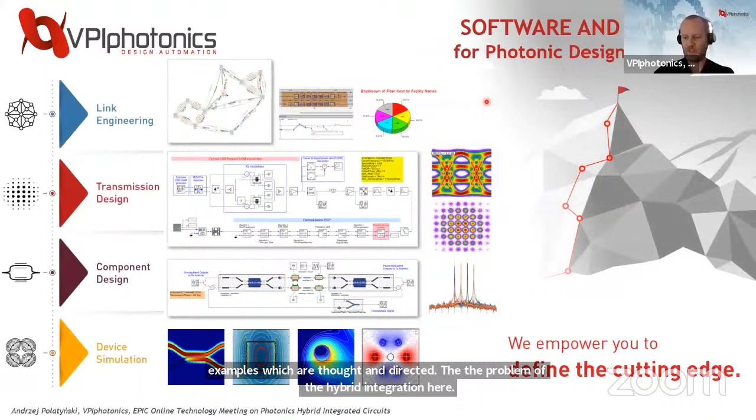And the third, industry leading - we are cooperating with many industrial and research collaborations to develop state-of-the-art PICs, also to set some standardization. I will just show you a few examples which are touching directly the problem of hybrid integration here. From our product perspective, I mentioned we are covering everything from the device to the system level. Today I will focus only on the PDK interface, which allows us mainly to link the foundry dedicated components to enable the PIC design with them and fabrication of the chip afterwards.

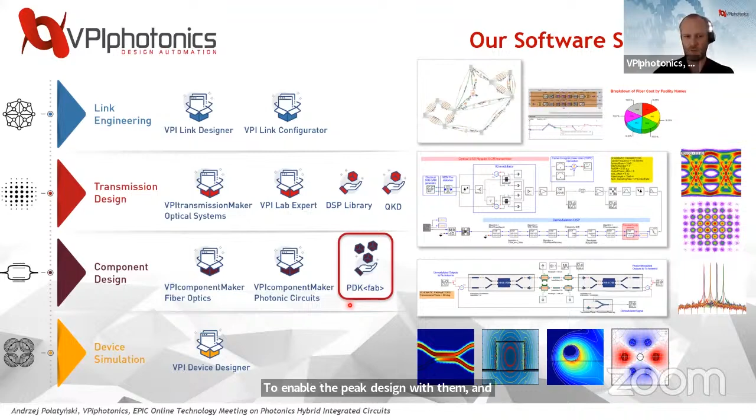So very shortly about the PDK - in a standard approach, the foundry just provides some kind of description of their processes in the form of a PDK library describing all necessary information, including the performance of the building blocks, layouts of them, but also the detailed description of the process that is created, that mainly reflects the technology steps in order to fabricate it.

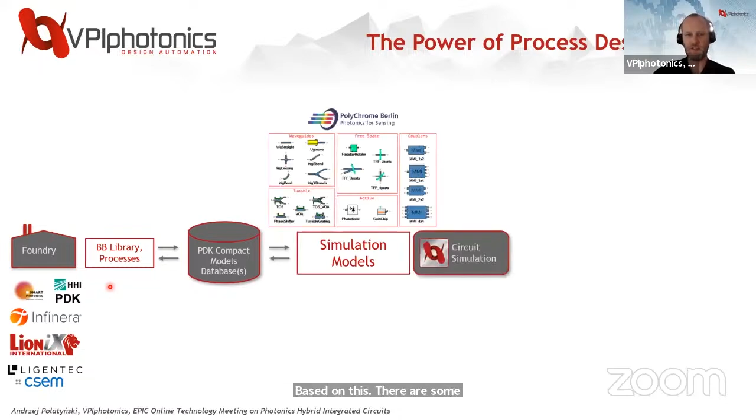Based on this, there are some PDK compact model databases created, and we created simulation models for it. These models mainly take the information from either measurement of the fab or simulations. And of course you want to bring this in hopefully some standardized format that will enable automatic creation of these generated simulation modules. Then once you have the simulation models, you are of course building your circuit design, which you are interested in.

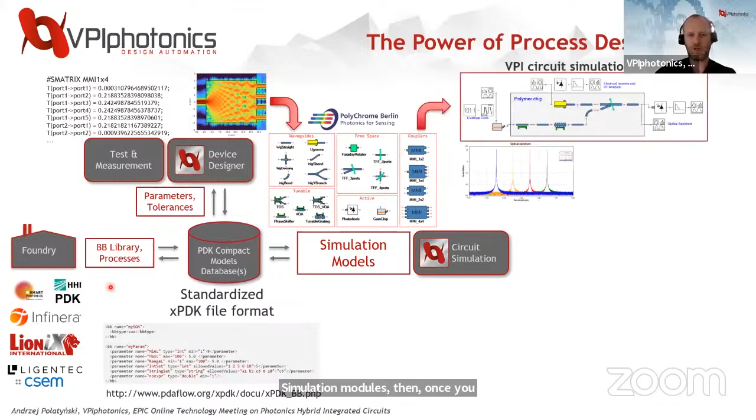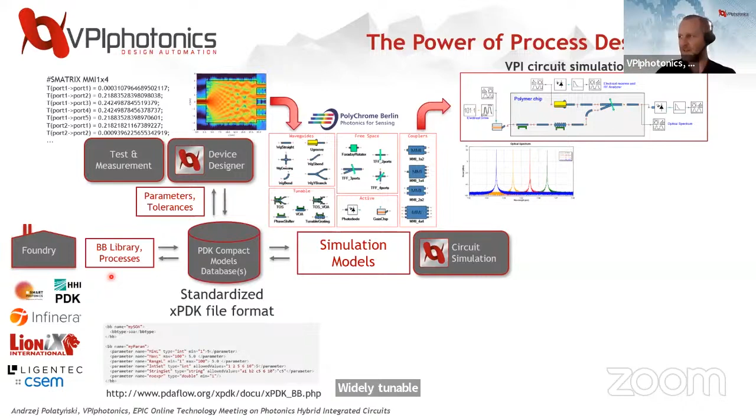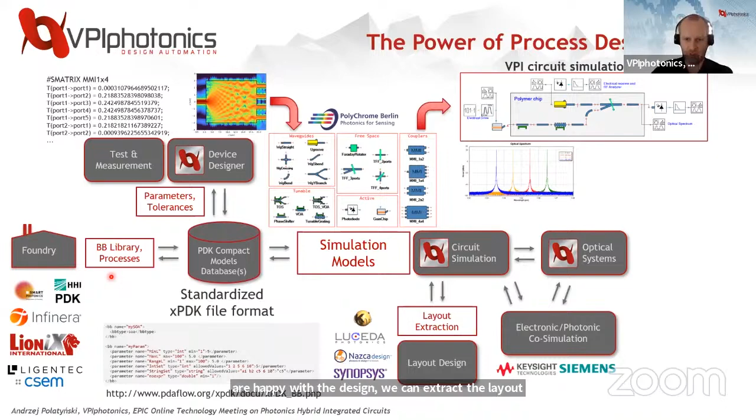Here I will come back to this example, but we see the reproduction of the widely tunable laser, which was shown by Moritz in HHI. As I mentioned, I will come back to this. The idea is that mainly we can simulate the PIC itself, but we can also verify this PIC on the system level. We can co-simulate it with the electronics. And once we are happy with the design, we can extract the layout process with the layout design in order to prepare the GDS file, send it to the fab to get our assembled PIC.

So now I will talk briefly about the different approaches which are used between different platforms in order to enable this hybrid PIC design. And first, I will start exactly with mentioning this transceiver in that part, which is a bit extended version of the HHI laser shown before. But mainly, we are interested in the final design, which you can see is already including some fiber component, including the coupled laser with the photodiodes on chip.

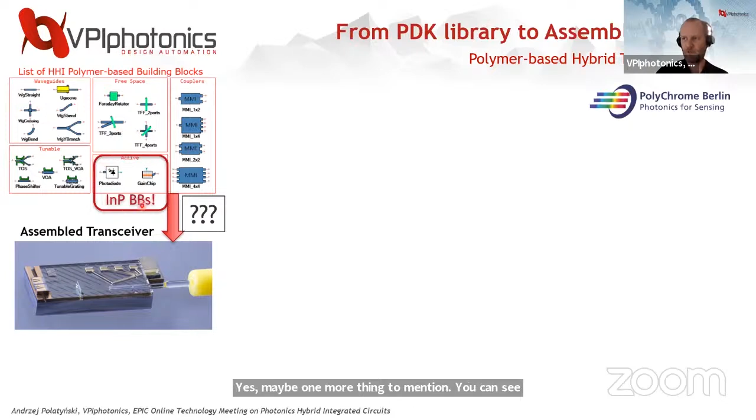But we start just with the building blocks. So how we do it, how we go through it. Yes, maybe one more thing to mention. You can see that within the PDK library for this polymer platform, we are already having some indium phosphide components. And that's exactly one of the typical approaches how foundries can enable direct integration of the platforms. So you are just building your polymer chip, which will include directly on top of it some additional gain sources, some additional photodiodes, or modules which are enabling direct coupling to the fibers.

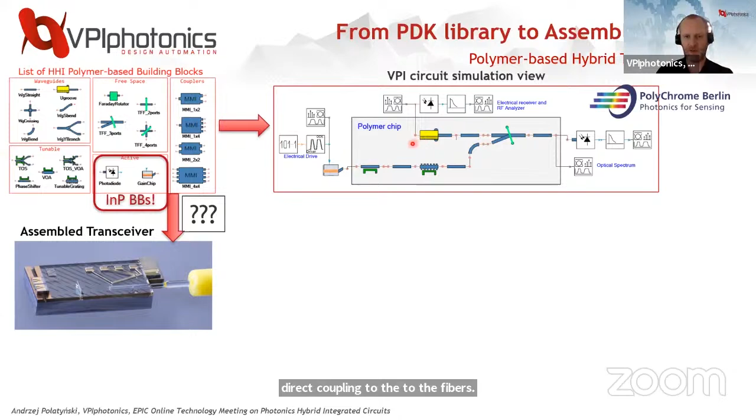And those components are already optimized for the fab, and they can be fabricated and assembled by the fab directly. This means that after your simulation, after you can show the results which you are expecting, you can directly export the layout to one of the desired layout tools and proceed with the GDS generation. Please note that the GDS is including only the layers here which are belonging to the polymer chip, but you can see there are some predefined spaces which are enabling you directly the integration of these components with

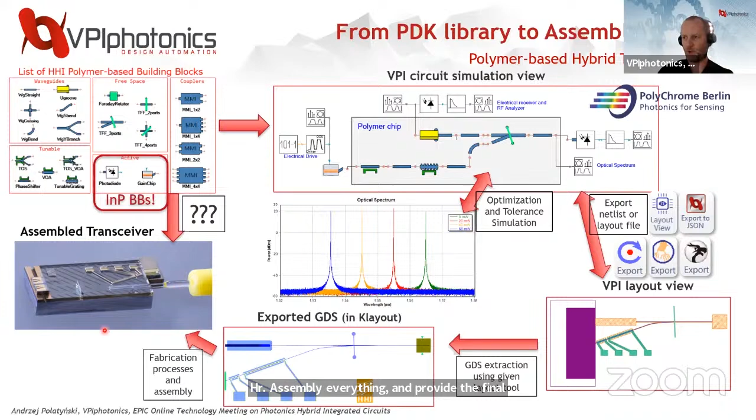this different platform modules. And in that case, if you provide such design with additional information how this needs to be coupled, HHI assembles everything and provides the final chip, which is assembled here with the polymer chip fabricated by them, and also the indium phosphide components created by their indium phosphide foundry.

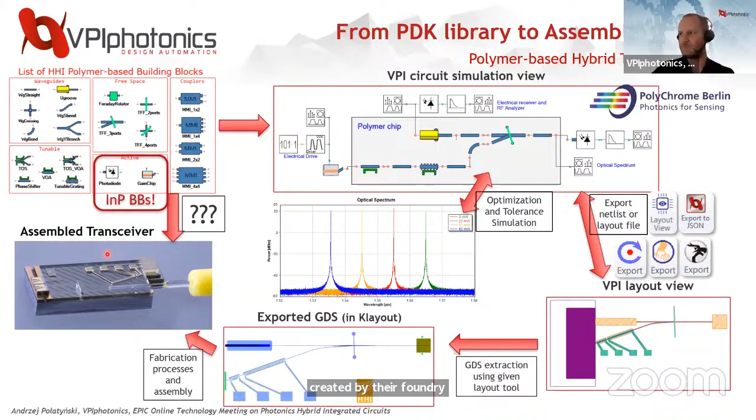Okay, but what's happening to all other foundries which don't really include the information about the standard component integration? So standard designs for silicon nitride, lithium niobate, or polymers don't really have directly the modules enabled there by the fab. And in that case, there are mainly two approaches by now, how you can make a design and fabrication. Firstly, directly talk to the fab and discuss with the fab what kind of building blocks they are offering.

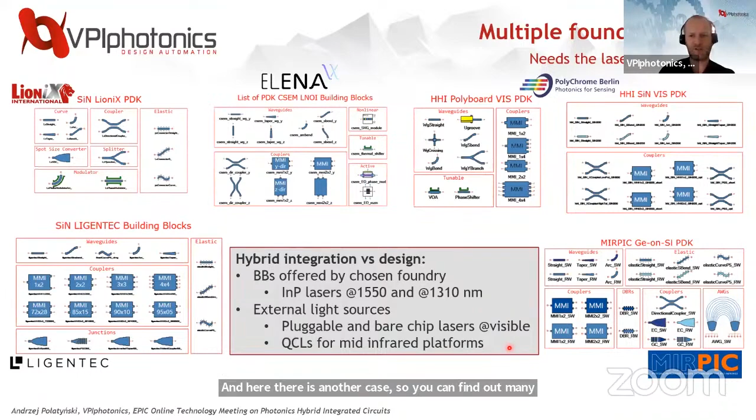And here a good example was the design which I mentioned already before, although the building blocks were generated there in the PDK directly, but you can discuss about different kinds of indium phosphide lasers or gain chips, which could be coupled there directly. On the other side, you can also use some external light sources. And here, there is another case, so you can find many pluggable or bare chip lasers for visible light, a lot of QCL lasers for mid-infrared, but there is one big issue with them. There is no clear information how to build an interface with them unless provided by the fab or provided by

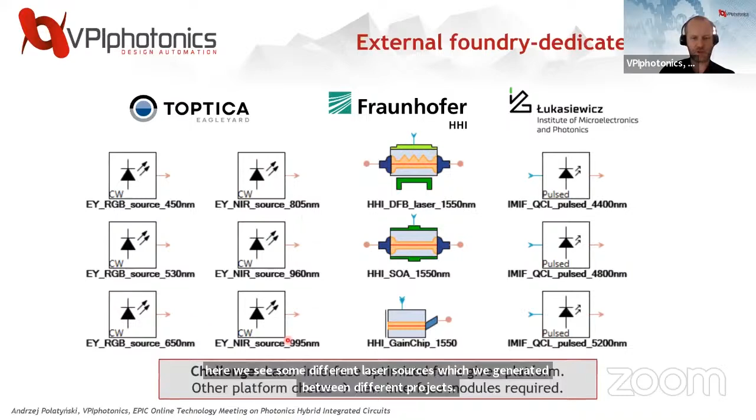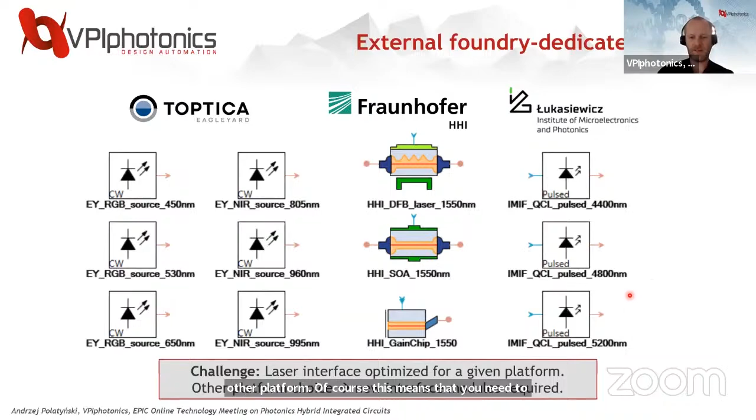the laser manufacturer. So here we see some different laser sources which we generated between different projects with some structures for visible, short near infrared, C-band and also for the mid infrared. They all were optimized in that case based on the project work for a given platform. If you would like to use these components with some other platform, of course, this means that you need to build your own interface module. And let's show how we can do it on an example.

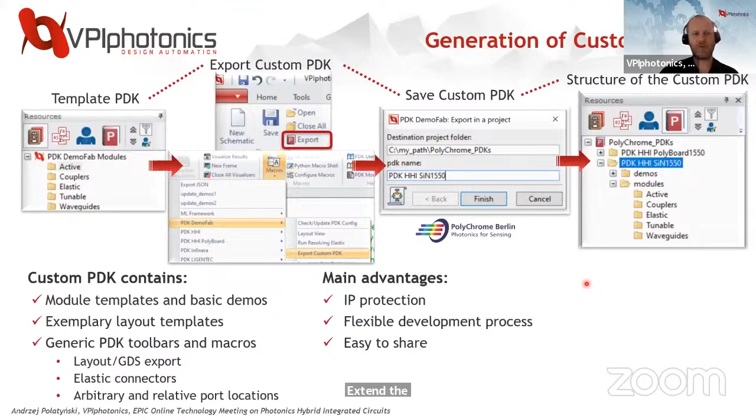But first, how we could generate, in that case, a template of the PDK that could work for us directly by enabling generation of your own custom PDK. So here we have a process of generating such a custom PDK. Mainly, it will include some templates. It will include some additional layout information. And while you are creating your own PDK, you can easily protect the IP. You can extend the existing PDKs and share them mainly with your own partners of interest.

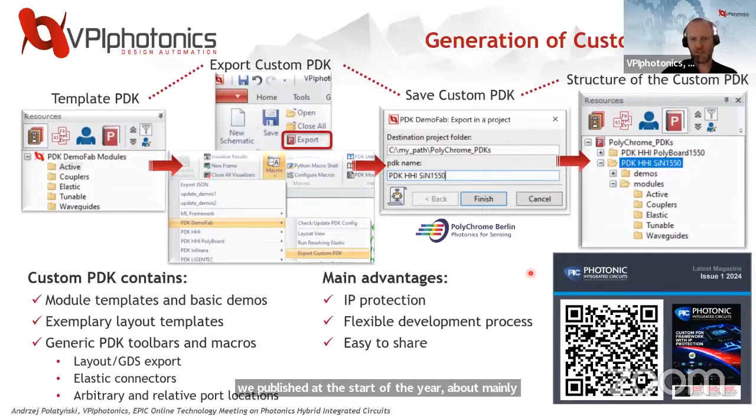And if you are interested in this process, please refer to the article that we published at the start of the year about mainly design freedom and IP protection using the PDK. And how this PDK can be used, based on the example I will show here:

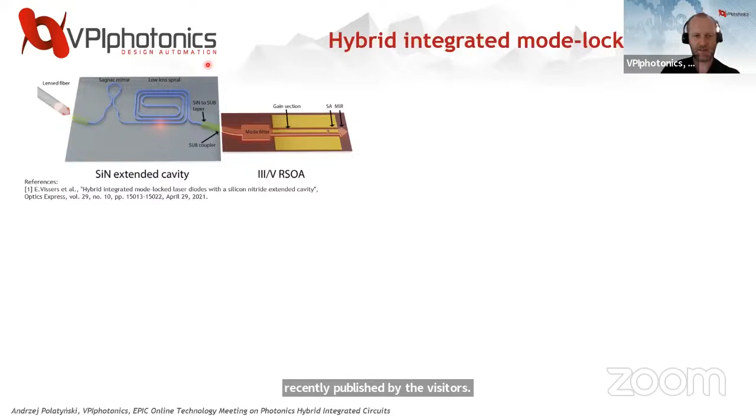the hybrid integration of the mode-locked laser using, on the left side here, the silicon nitride extended cavity based on LioniX. And here we have the SOA structure based on Smart Photonics. This idea was published three years ago by Vissers, mainly explaining the design itself and fabrication of the structure.

So very easily we are creating a library of the components. We are using on the left side the components for the silicon nitride, equivalent with the PDK of LioniX. On the right side we have the indium phosphide components equivalent to Smart Photonics and adapted to the performance of the measured devices.

And here we see one additional magic component, which is actually the spot size converter between one and the other platform. I'm especially not looking into this component, but if you are interested exactly how it functions, you can refer back to the paper. It's described in detail, including even some tolerances of the coupling and misalignment with the total map, how the coupling should behave.

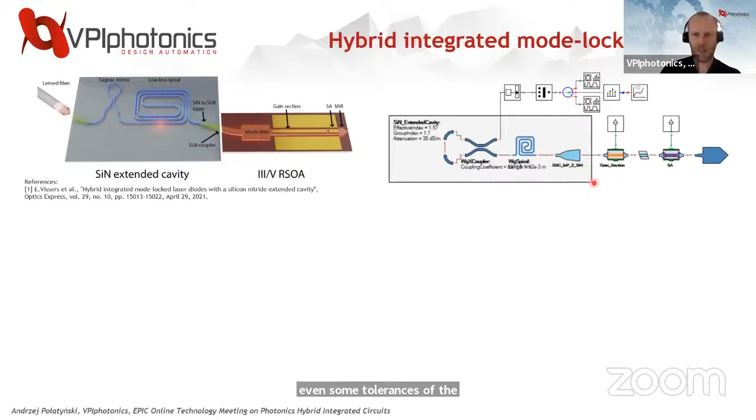But from the perspective of the design, such combined platforms can be created on a single chip when you are directly simulating the performance. So here we can see the spectrum of our laser, we can measure the repetition rate and also observe the waveform very similar to the ones achieved in the paper.

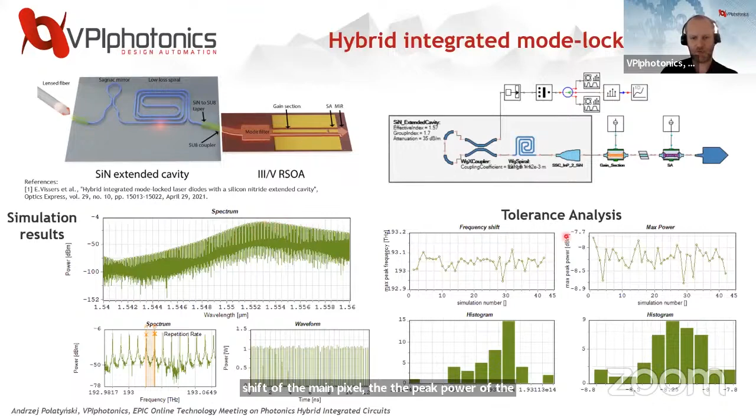And of course, on top of it, we can perform some tolerance analysis, either based on the tolerance analysis implemented by the foundry or by varying parameters of interest and providing a tolerance analysis of our choice. In that case, I was using mainly the provided information from Smart Photonics on the tolerances plus some additional Gaussian variations on given components to investigate how the frequency shift of the main peak, the peak power of the whole spectrum, and the maximum power of the spectrum behave based on a given number of runs.

So to conclude, what you can do for us: firstly, you can use our tool to develop your own PDKs and share them with your customers in order to allow them to follow up with your designs. But also we will be very happy to get feedback from you regarding your design needs and your PDK development, especially if something you believe should be added to the tool.

And where we can help you: we are enabling various strategies for the PIC design, offering the workflow from devices to systems via circuits, and offering you the custom PDK framework, enabling you to develop your own components and interfaces to build the design and fabricate those integrated platforms directly. We are also helping to accelerate this design together with the export to the layout, which we presented several times before. And we are offering personalized support to help develop these PDKs.